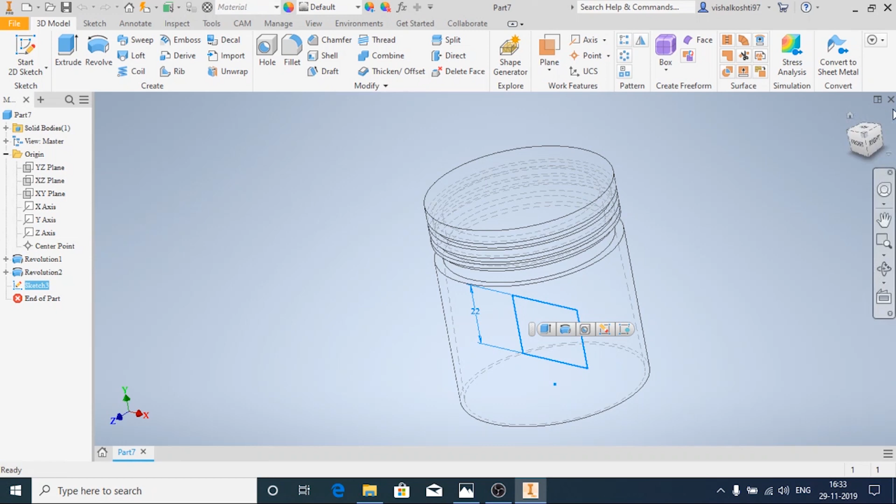Open Inventor and then click on New. In Metric, choose standard mm.ipt and then click on Create. Start 2D sketch and then choose the XY plane. First, I'm going to draw only this upper profile and then I'm going to use the option Revolve.

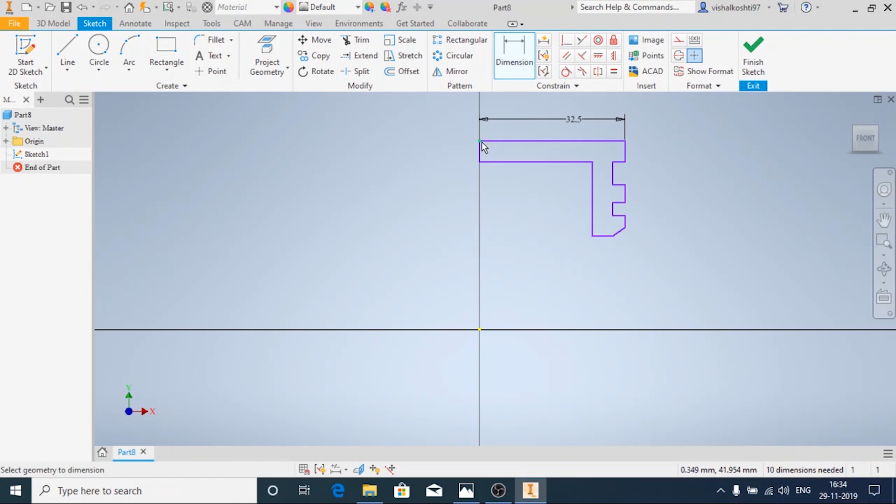Now we'll add the dimensions to it. This dimension is given as 65 divided by 2. We are going to enter only the half of the dimensions since we are going to draw only the half of the profile. Sixty-five divided by 2, and the height is given from the bottom as 64.

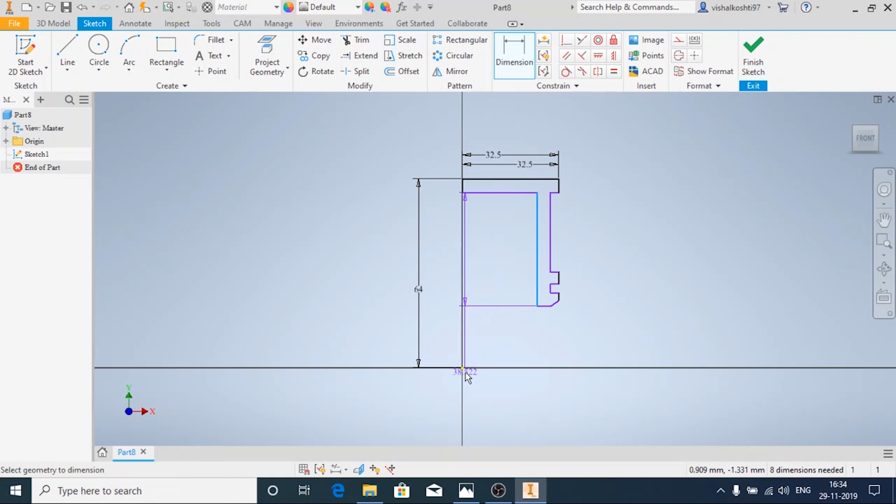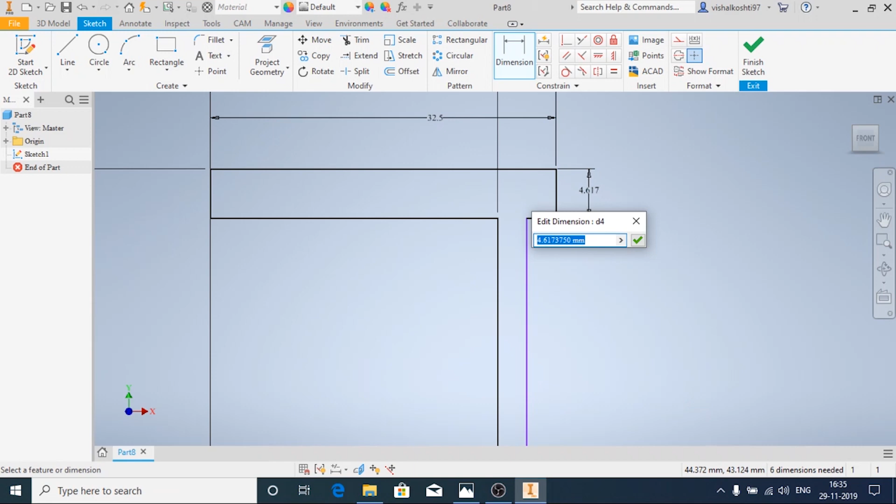And this is given 54 divided by 2. This is given as total as 5. The inner distance is given by 2.4.

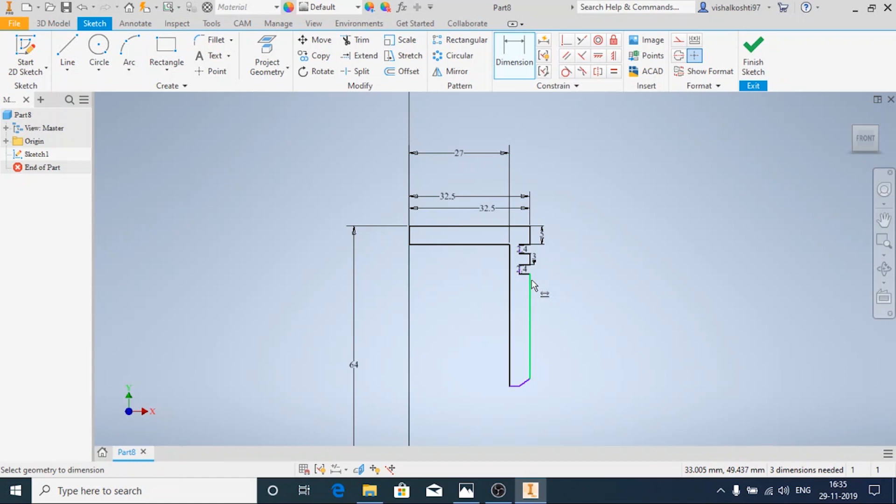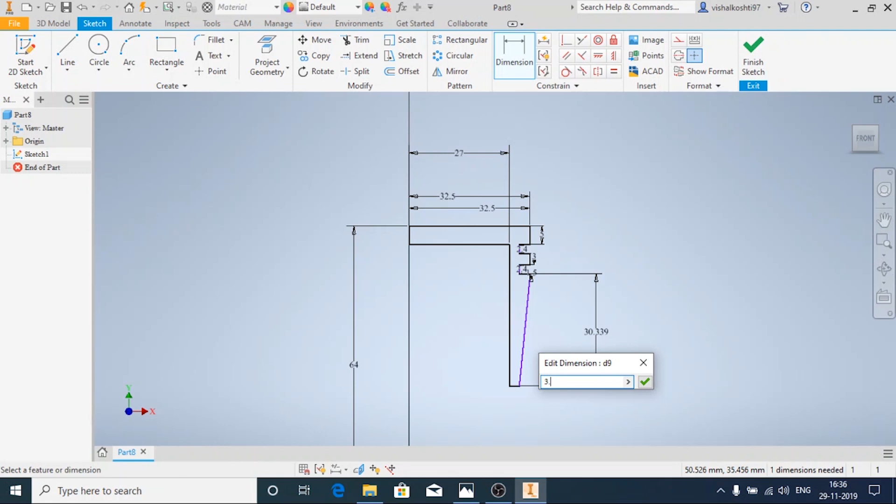This is given 3. Again this is given by 2.4, and this is given by 1.5. This detail is given in this view. As you can see, this is 1.5 mm and the total is 3.2. From here till here it is given as total 3.2, and the angle is 135.

Now it is fully constrained, and then click on Finish Sketch. Now we are going to use the option Revolve. By default the profile is selected. If the profile is not selected, make sure the profile is a closed profile and there is only one closed profile. I'm going to choose this axis and make sure it revolves at an angle of 360 since it is a complete circle.

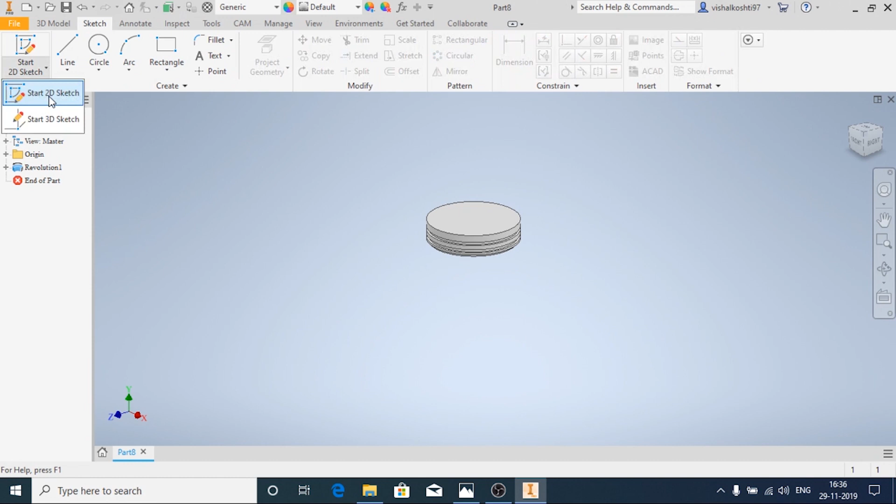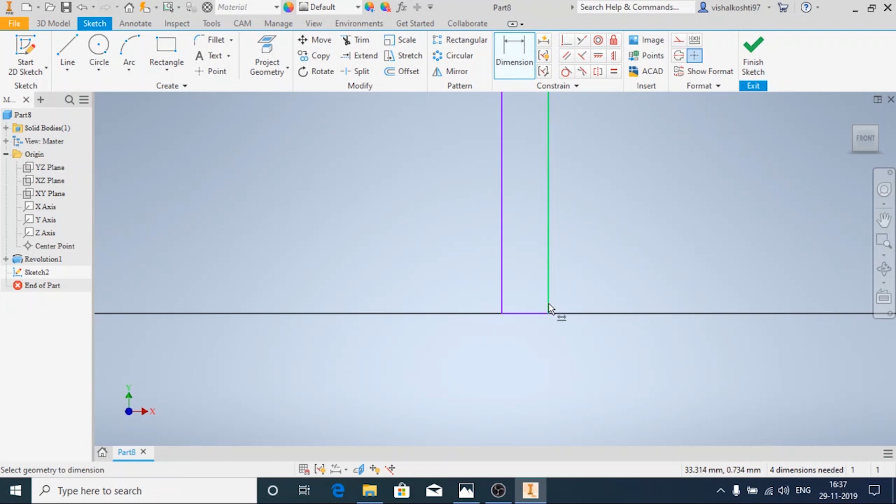Now again go to 2D sketch and then click on XY plane. Now we are going to make the bottom half. Now I'm going to dimension it. I'm going to add a horizontal constraint and now I'm going to add dimensions to it. From this point to this point it is 65 divided by 2. 8 divided by 2, and the inner is 62 divided by 2.

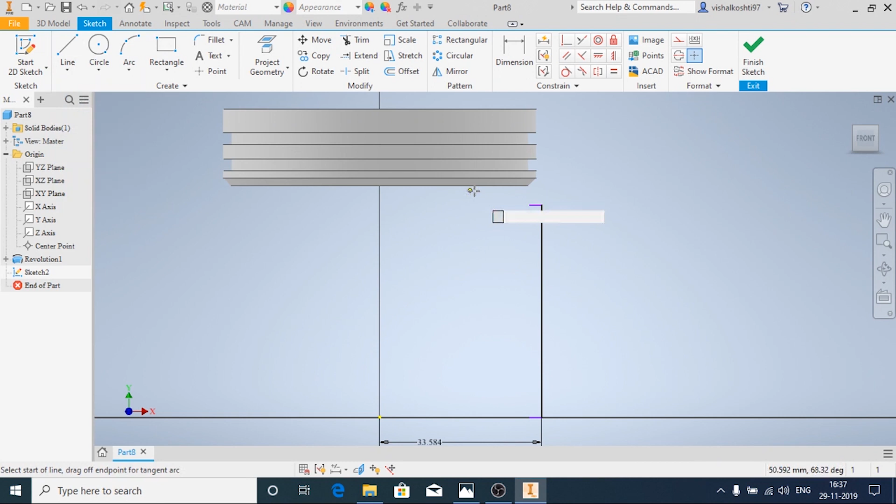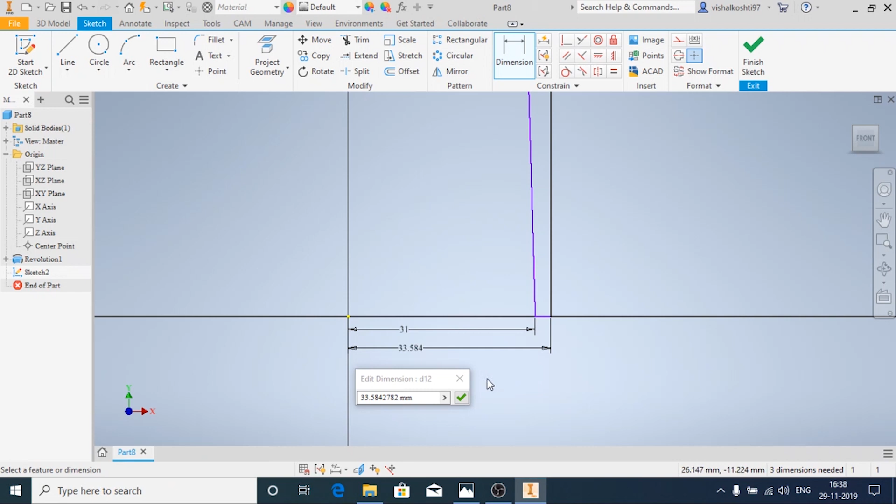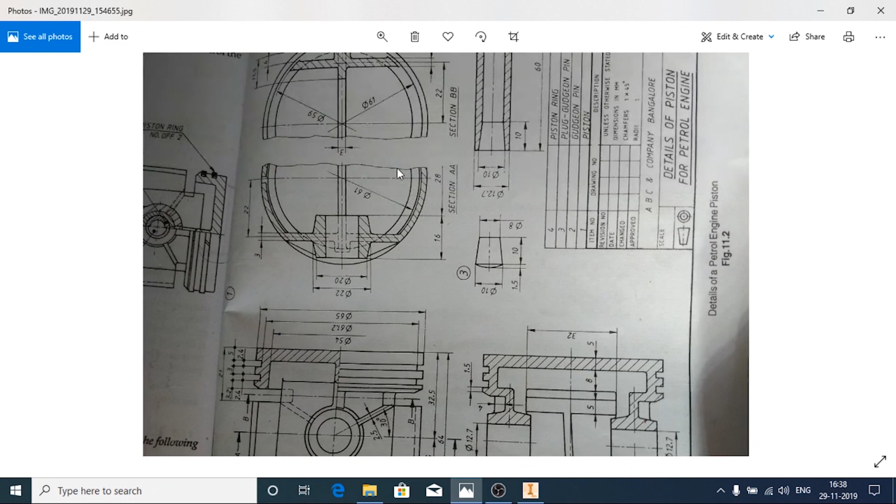Make sure this line is not the straight line. To trim this. 62 divided by 2, and this is 65 divided by 2. And from the top the distance is given as 21. Here it's given as 21 mm from the top, and at the top the inner diameter is given in this view, that is 59 mm. So it will be 59 divided by 2 again, and then click on Finish Sketch.

And now we'll again choose the option Revolve. By default the profile is again selected, and then we'll revolve at an angle of 360 degrees and then click on OK. And we are going to change the view type. I'm going to change it to wireframe with hidden edges. Now start 2D sketch in the same XY plane.

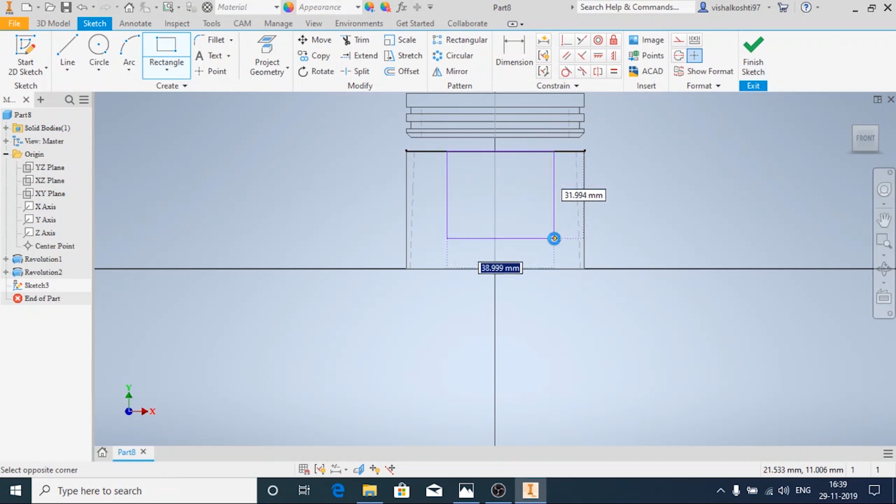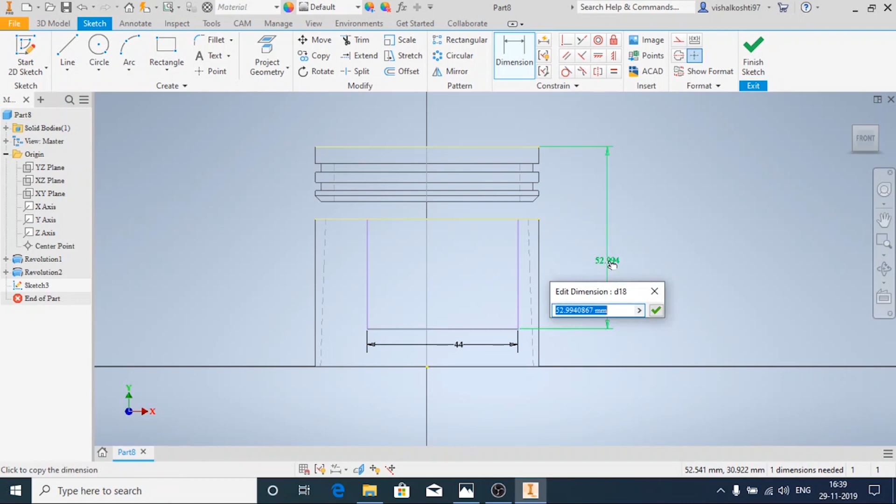Now I'm going to draw the rectangle. It's going to be 44 mm. Since it should be symmetric, I'm going to give this dimension as well. From the top till the bottom of the rectangle, the distance is given by 17.5 plus 32.5. So let us enter the dimension as it is: 17.5 plus 32.5.

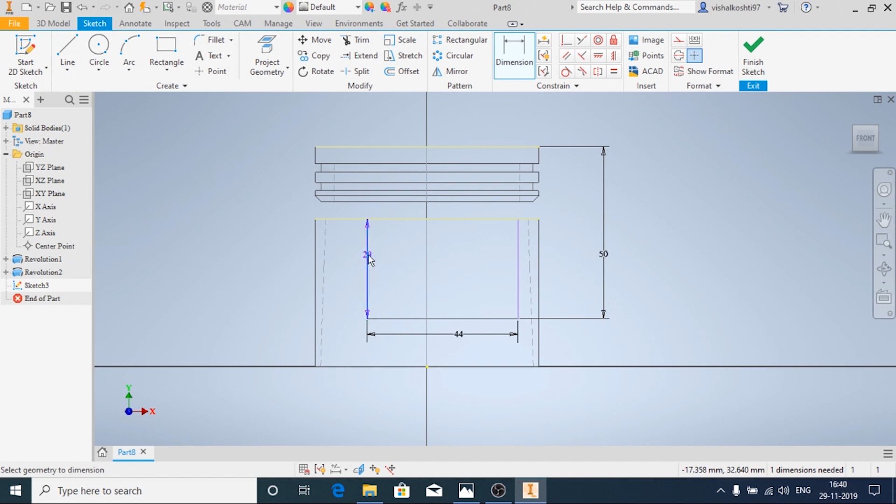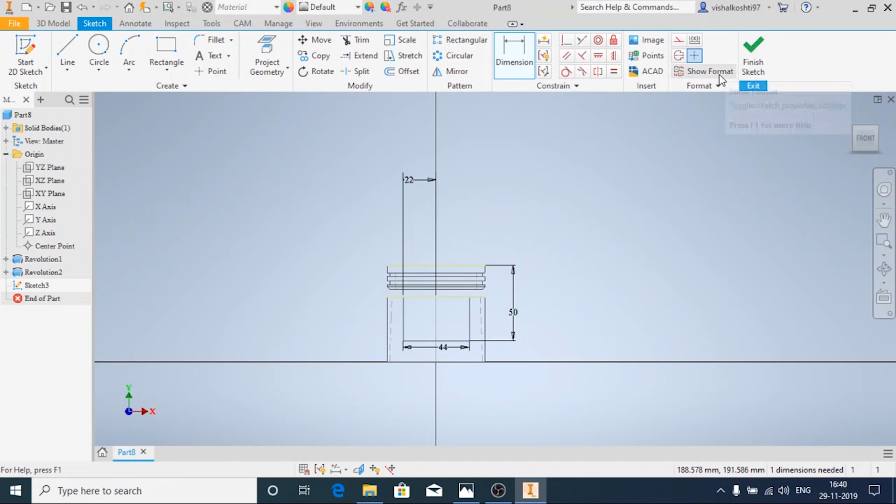I'm going to make a construction line over here. From this line to this line, it is 22 mm, since it should be symmetric. Now it is constrained. Now I'll click on Finish.

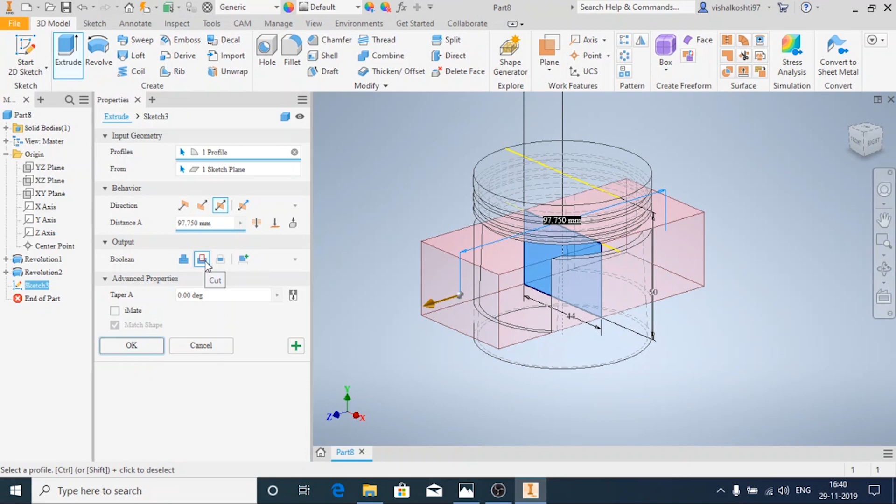I'm going to cut it using the option Extrude, and since it should be symmetric, I'm going to choose the direction symmetric, and now I'm going to pull it in the opposite direction. In the output there is a boolean. Choose the option called Cut because we have to remove the material right now. Now we'll see it shaded with edges. Now we'll make this one visible.

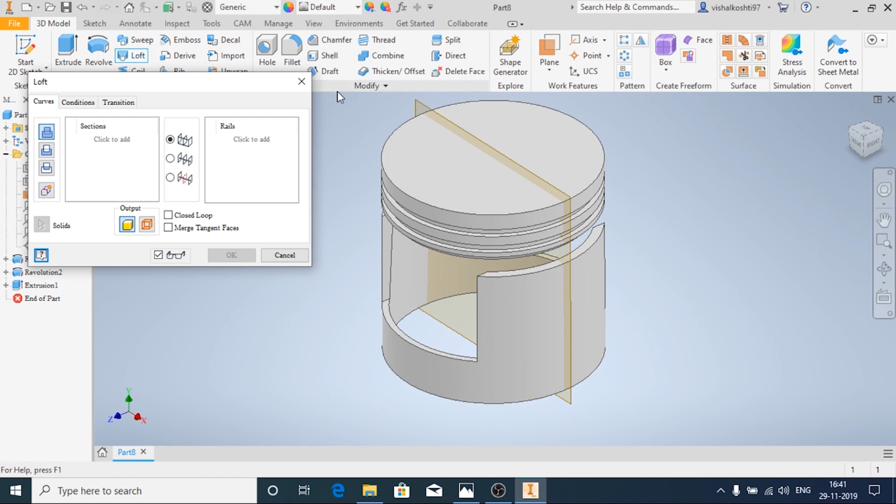Right click and then click on visible. Now we are going to create 3 planes because we need to draw this profile, and since it is not the symmetrical profile, we are going to use the option loft, and we need to draw 3 different profiles. So we are going to make 3 different planes.

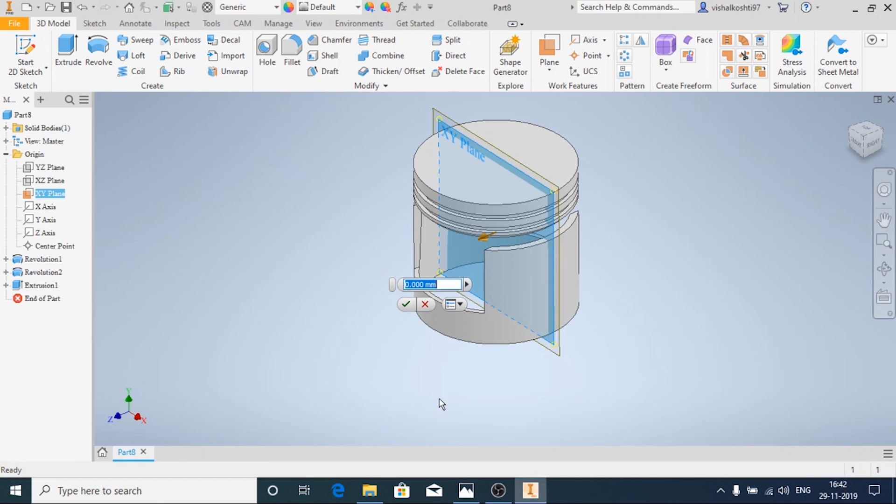You can add the plane by just using the plane option over here, and then just offset from the plane, and we are going to specify the distance. The first distance is given by 32 mm from the center, sorry, 22, and from this point to this point 8 mm,

and now you can choose this plane or this plane. If you're going to choose this plane, it is going to be -8. If you're going to choose this one, it is going to be -16. Now we'll hide this XY plane. Just right click on XY plane and untick the visibility mark.

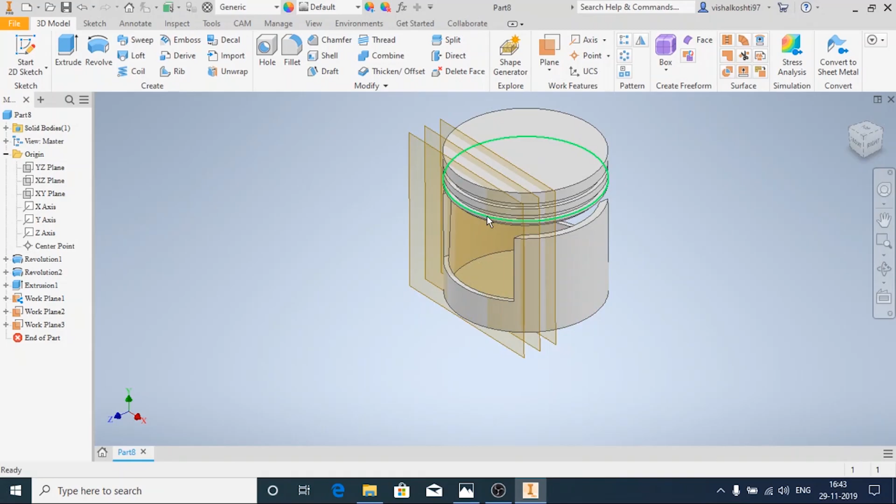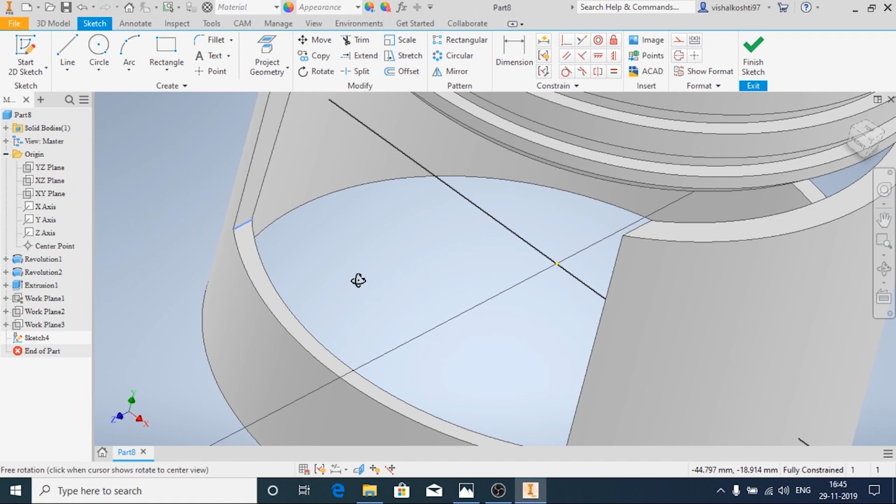I forgot to add one more feature. I'm going to hide these three work planes, and now I'm going to choose this plane. I'm going to rotate it and I'm going to project this geometry as it is. This geometry as well as this line, I'm going to project it. That is, you don't need to draw the line. Whatever is there in the surface, that line will be projected. Now you can see, now I'm going to make a rectangle from this.

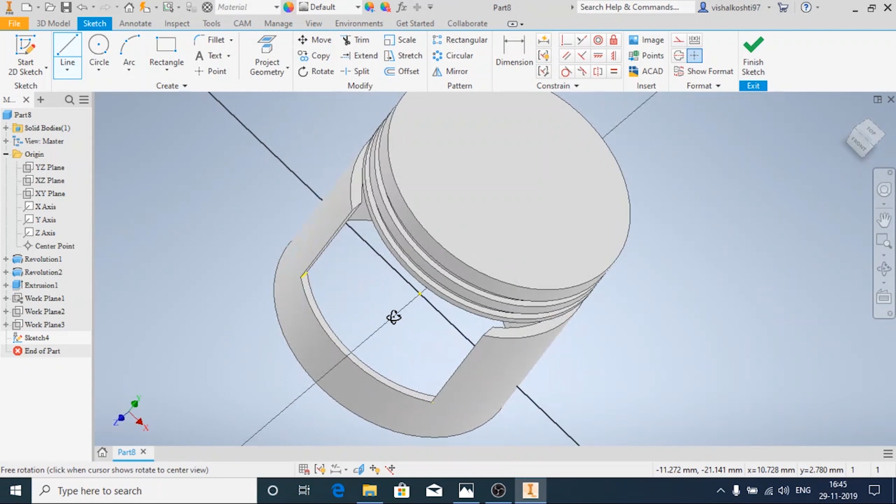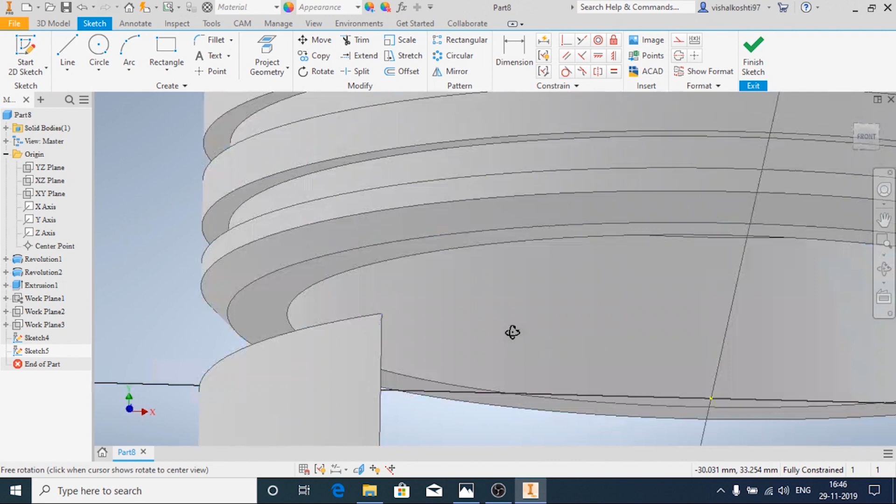Now I'm going to draw one more profile over here. We cannot use the extrude option for extruding this rectangle since this circular profile is not symmetric. It is thin at the bottom and thick at the top. So again I'm going to choose this profile and then select the plane about which you need to draw the sketches. Now again I'm going to choose this plane, this plane, and then click on project.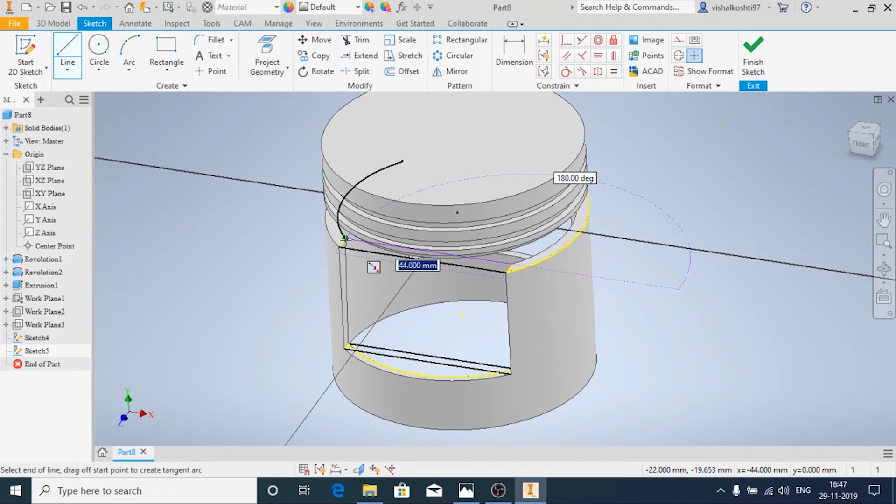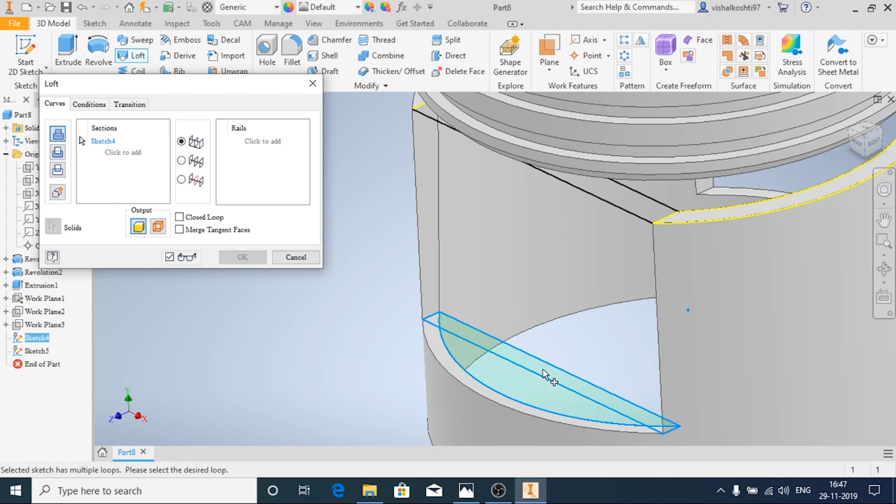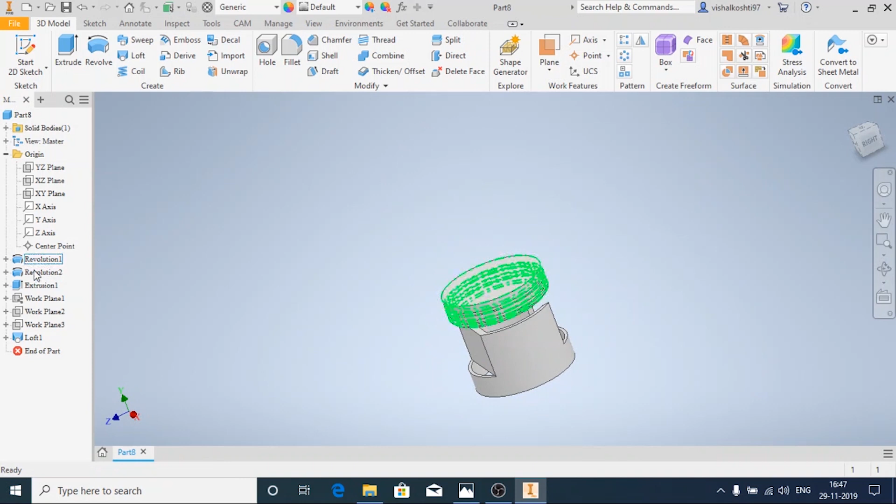Then click on finish sketch. Now we'll use the option called loft. Click on loft and then choose this closed profile, and this profile. Now you can see the material has been added. Now we'll make all these work planes visible. Right click and then click on visibility.

And now we are going to draw three different circles on three different planes using these details, 20 mm diameter and 22 mm diameter. Just click on the outermost plane and then click on the sketch. In the center plane is the biggest circle, and in the inner and the outer plane the circle is of smaller diameter. So first we have chosen the outer plane, so it will be the diameter of 20 mm. So let us make a circle of diameter 20 mm.

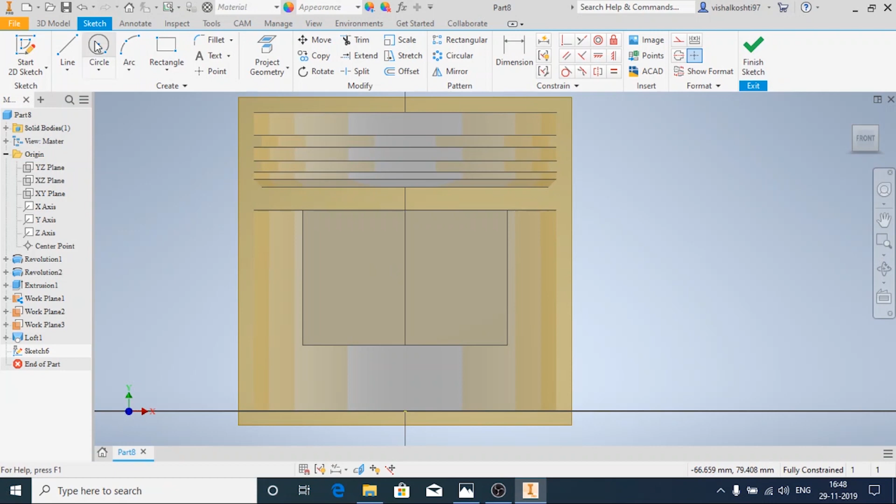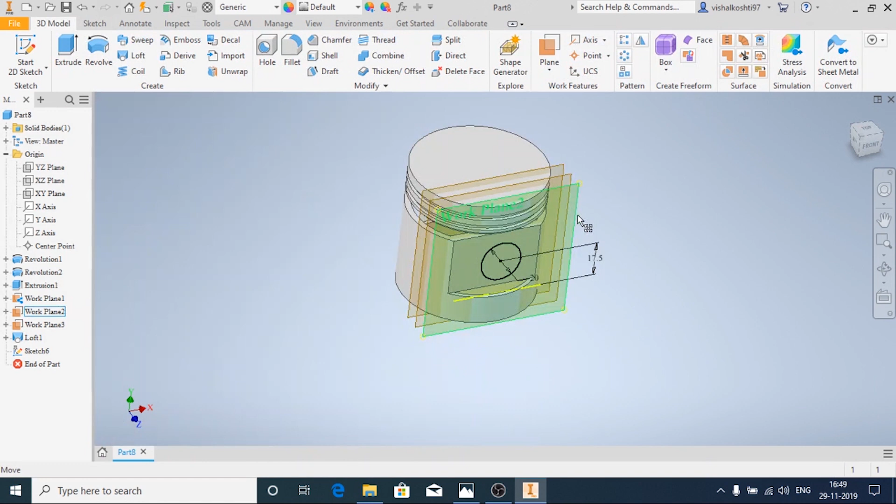And the distance of the center of the circle from the top is given as 32.5 mm, or from the bottom of the square also you can give it, that is 17.5 mm. And now I'm going to add, since it is the smallest circle, the diameter is 20 mm. Now we'll choose the third plane and start the 2D sketch.

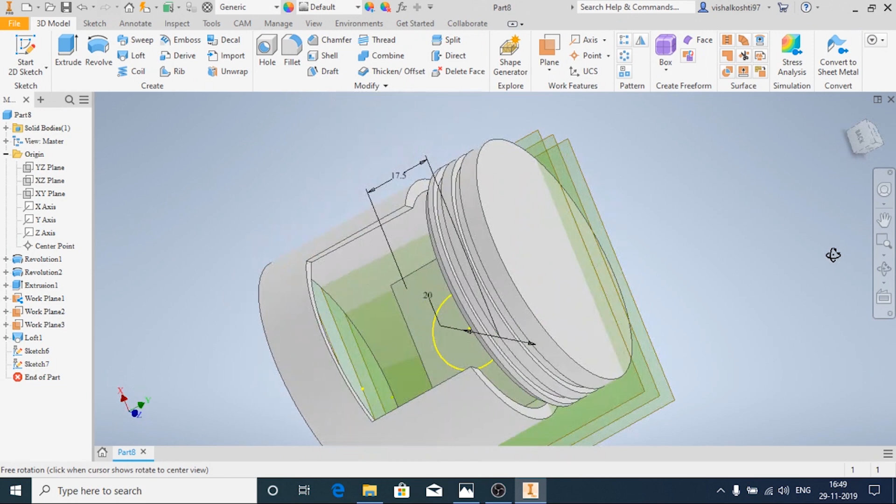Now I'll not draw the circular profile again. I'll just project this. That's it. You can see it has been projected. And now we'll choose the center plane, and I'm going to draw a circle again. And I'm going to make these two circles concentric so that the center point remains the same. Now I'm going to add the dimensions. It is 22 mm.

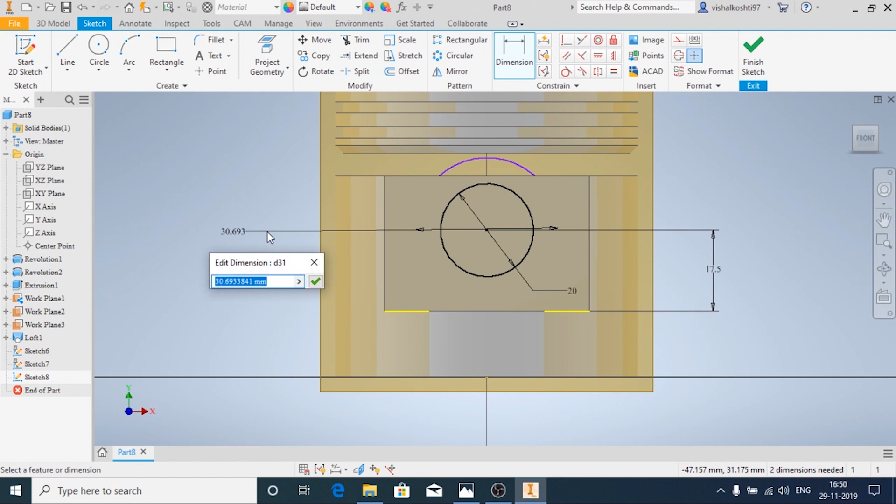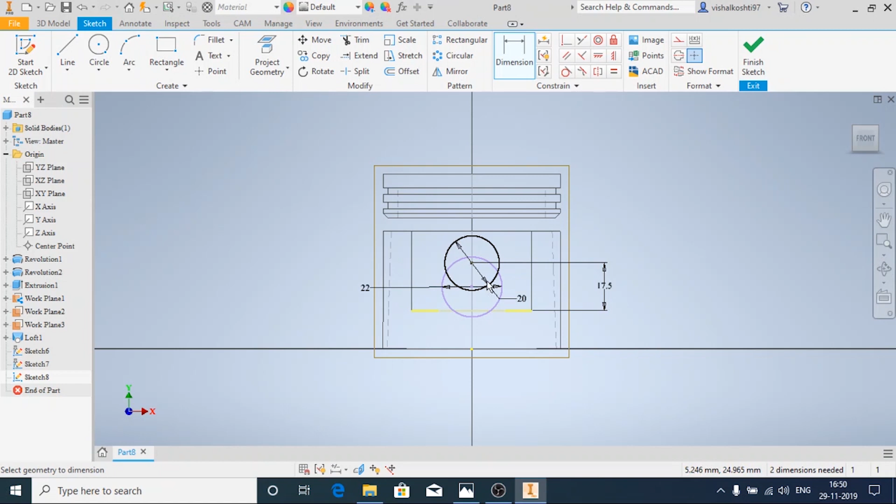I'm going to change the view, since I'm going to add one more dimension to it, 17.5, and I'm going to make it. Now I'll hide all these work planes, and now I'll choose the option called loft.

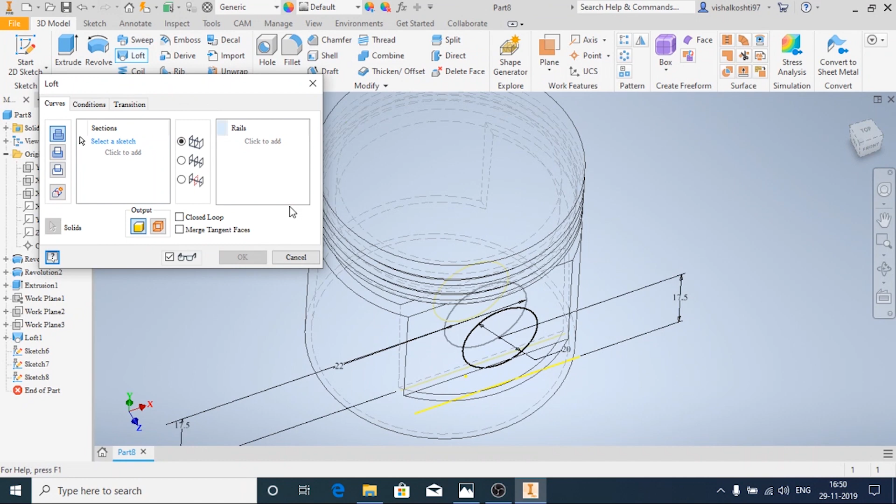Loft is the option which is used to make different profiles, and you can provide them with the guide curves, that is the path along which the material has to be added, and it should be done in order. The circles should be selected in order, otherwise the proper profile won't be generated. And then click on OK.

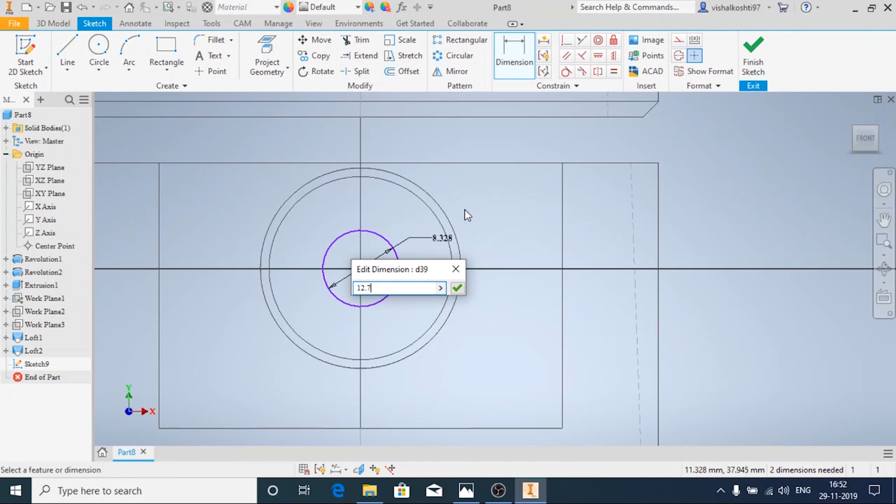Now I'm going to add this inside hole, which is of diameter 12.7. I'm going to use this plane and then start the 2D sketch. Diameter is given as 12.7 and 17.5 mm. I'm going to add one more constraint.

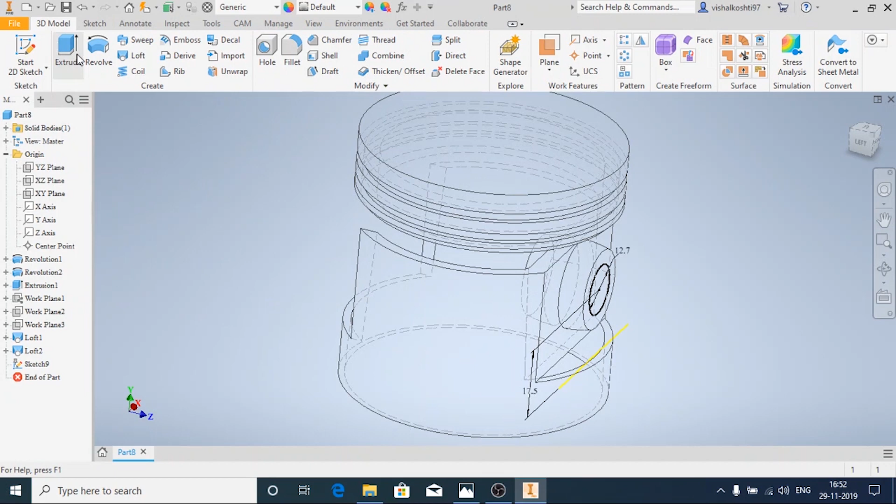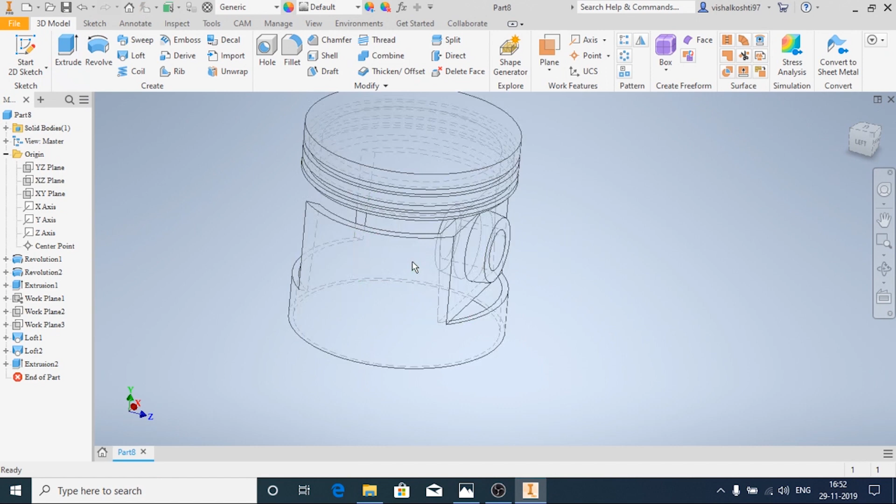Now I'll use the option extrude to cut the material. In the output, I'm going to use the option cut to remove the material, and then click on OK. Now I'll change the view back to shaded to check that it is proper.

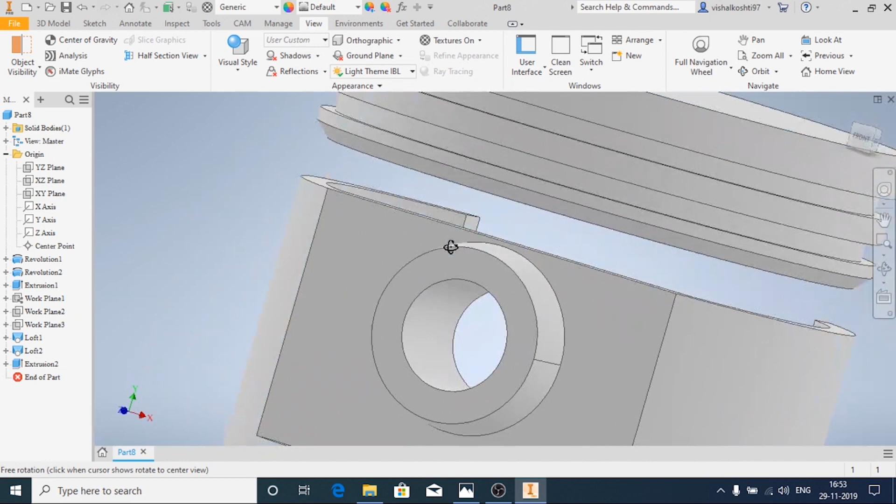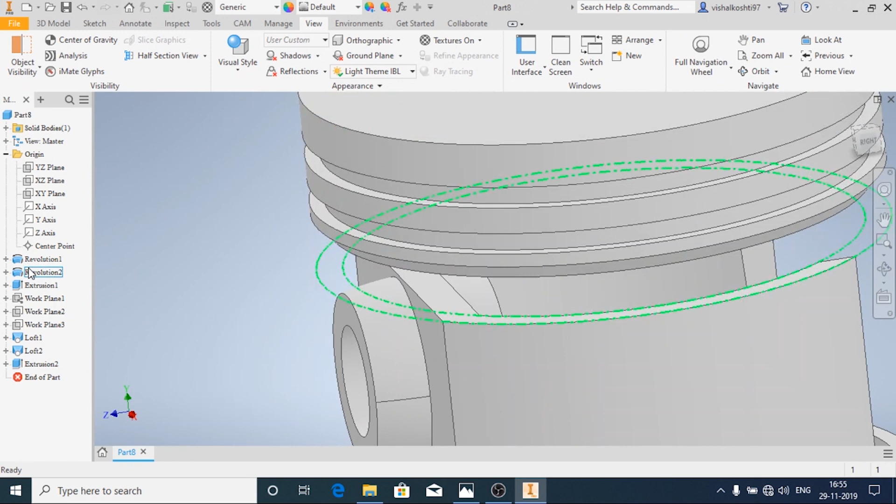Now whatever I have done on this side, using the mirror option we'll do it on this side later, because we are going to do some other features which are required again for mirroring. Now for the time being, let's hide this one using the option suppress.

Now go to sketch, start 2D sketch and select this plane. And these details we are going to draw. The outside is given as 6 mm and the inside 3 mm thickness. This distance is 4 mm.

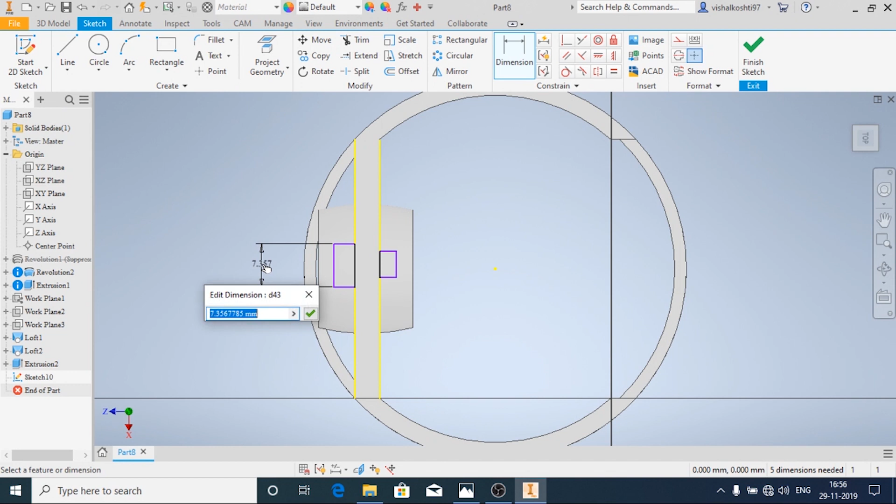Now let us add the distance. This is 6. From this point to this point is half, so it is 3 mm. Same goes with here. This total distance is 3. This to this is 3 divided by 2, that is 1.5. From this point I choose 1.5.

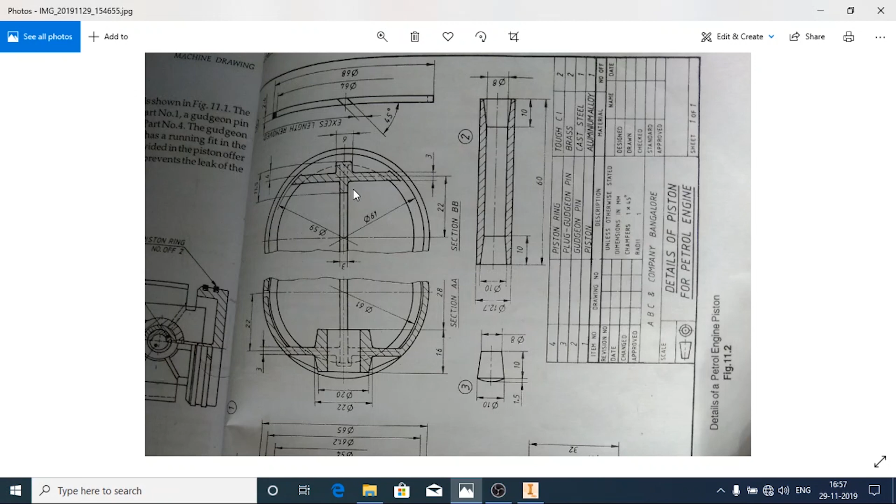This distance is given by 4 mm from this point. And the total distance from this point to that point is given by 11.5. So from this point to this point it is 11.5.

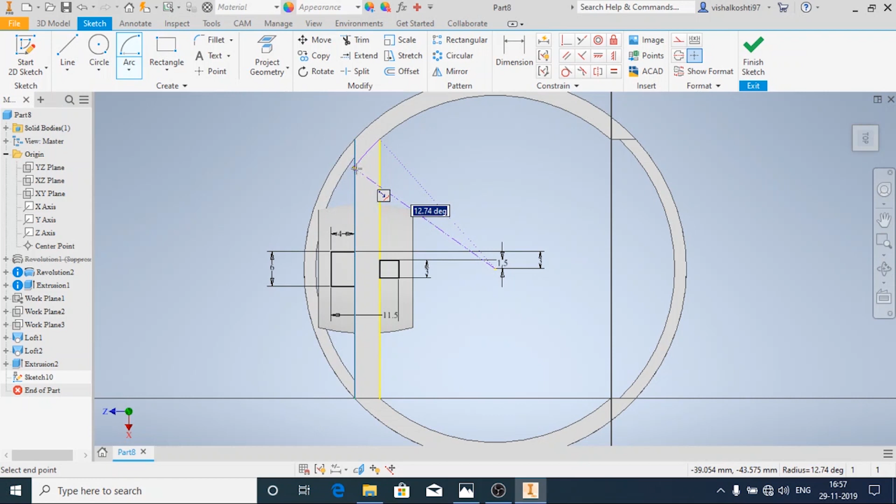Now we'll make an arc. We know the center point. Same. And one more arc. This and this should be concentric, and yeah, this one should be concentric. It's already concentric.

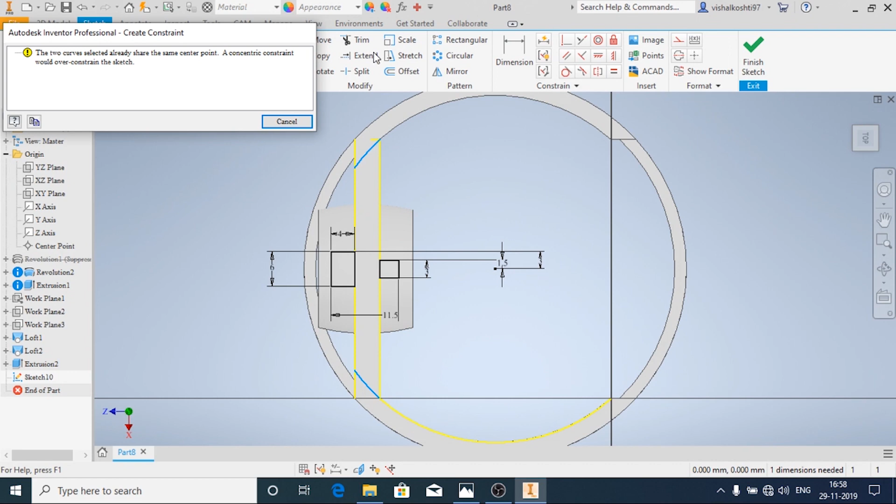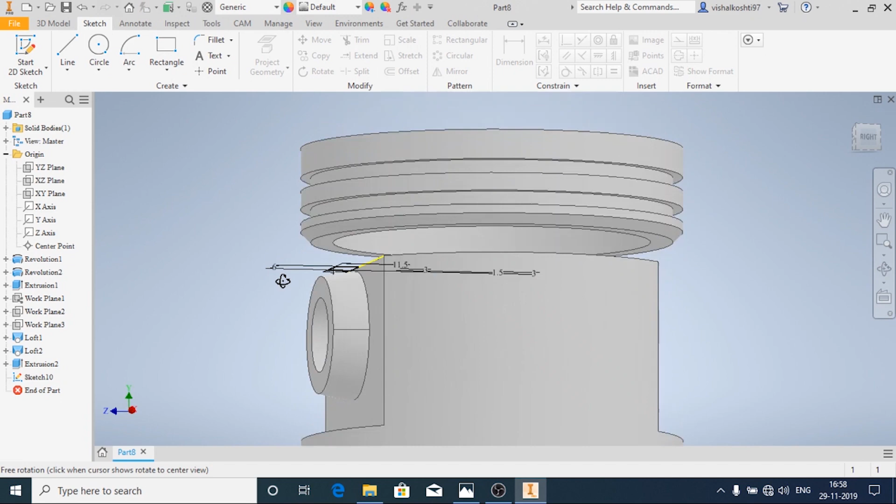And now we'll unsuppress this. We'll click on finish sketch and then click unsuppress this feature. Now we'll change the view type. And now we'll extrude the geometry one by one. I'm going to extrude it on the opposite side till the surface.

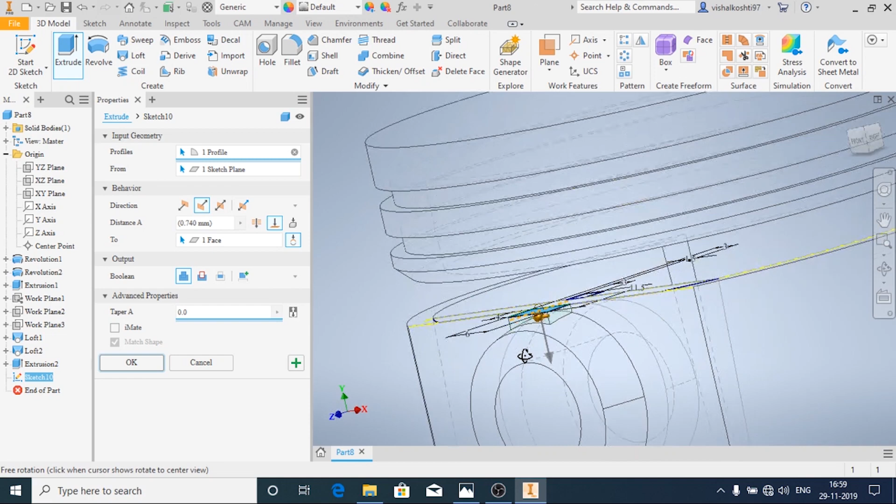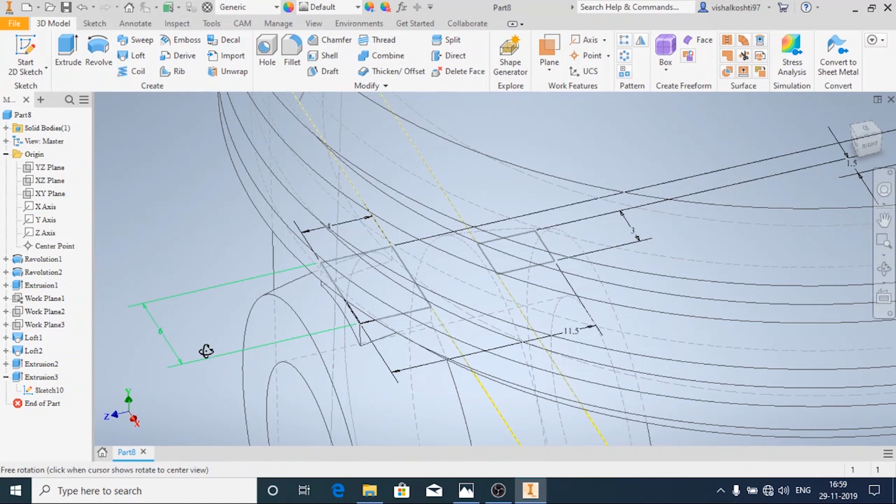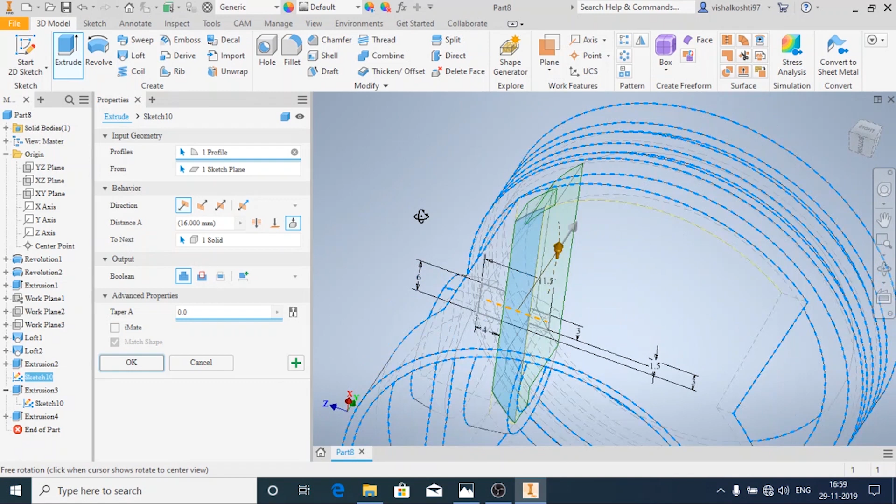I'm going to choose one profile first. Next, I'm going to choose this profile. First, we'll do it one profile at a time. Okay. Now we can see that the sketch has been hidden. We can make it visible again. Now again we will extrude this till this piston top.

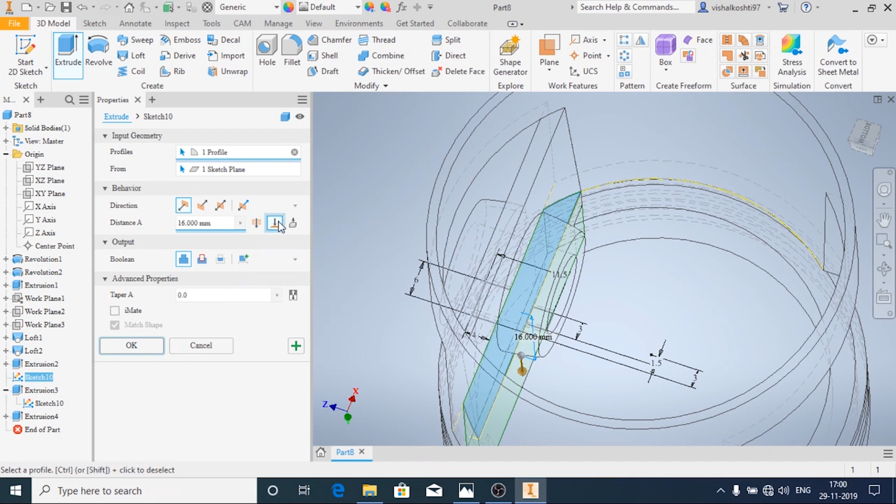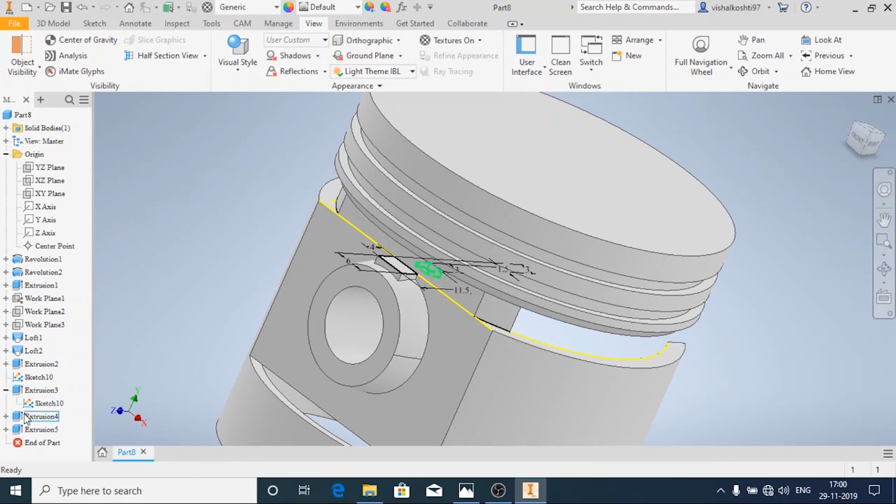Then click on OK. And now we'll change the view back to normal, that is shaded with edges. Now I'll hide the sketch. I need to extrude this again. I'm going to make the sketch visible again.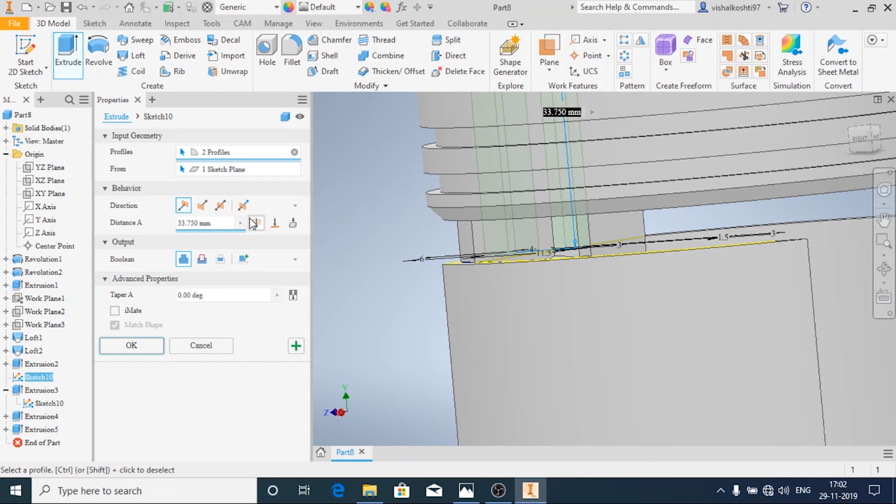And now I'm going to use the option extrude, this and this, and I'm going to use the option up to next, so that up to whichever surface it ends, till there the extrusion takes place. And now I'm going to hide this. Now it is of no use.

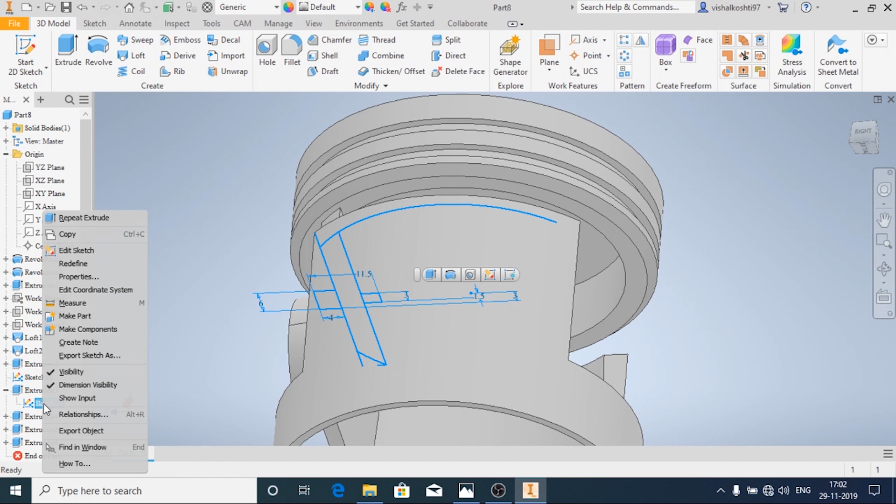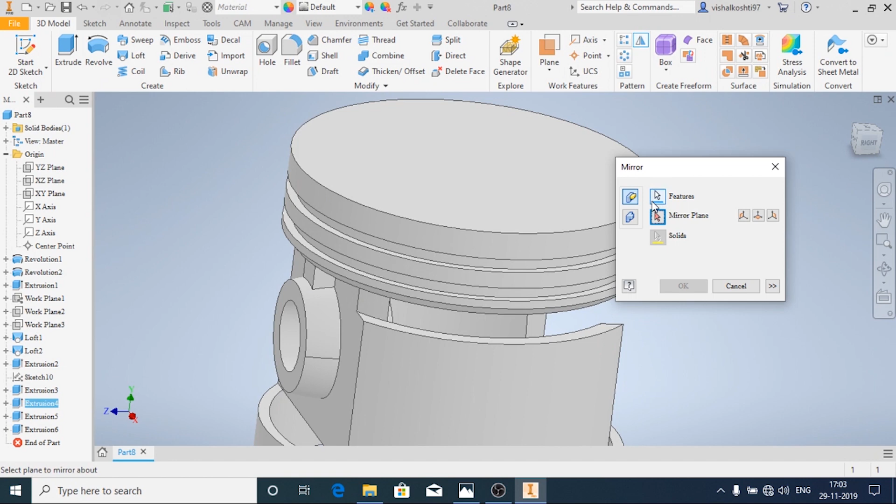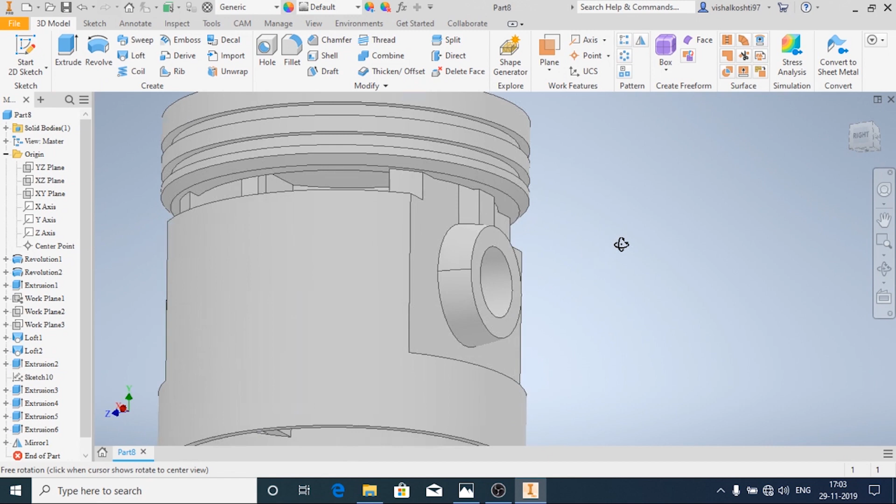Now I'm going to use the option mirror. I'm going to select the features. I'm going to choose this loft 1, loft 2, extrusion, this, and I'm going to mirror it about this axis, and then click on OK. Now I'm going to change the view back to wireframe with hidden edges.

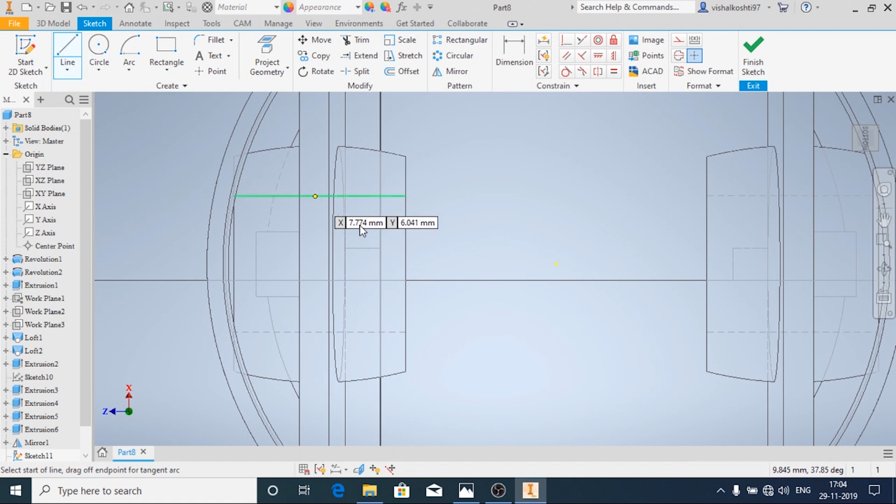Now I'm going to draw a line from this end to this end. Now I'm going to extrude it to a distance of 7.8 mm. 7.8, and click on OK. Now I'm going to change back to shaded with edges.

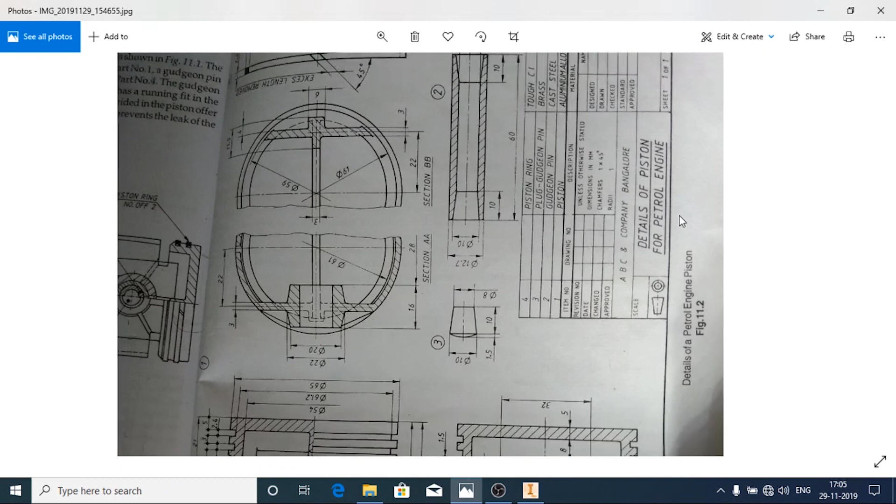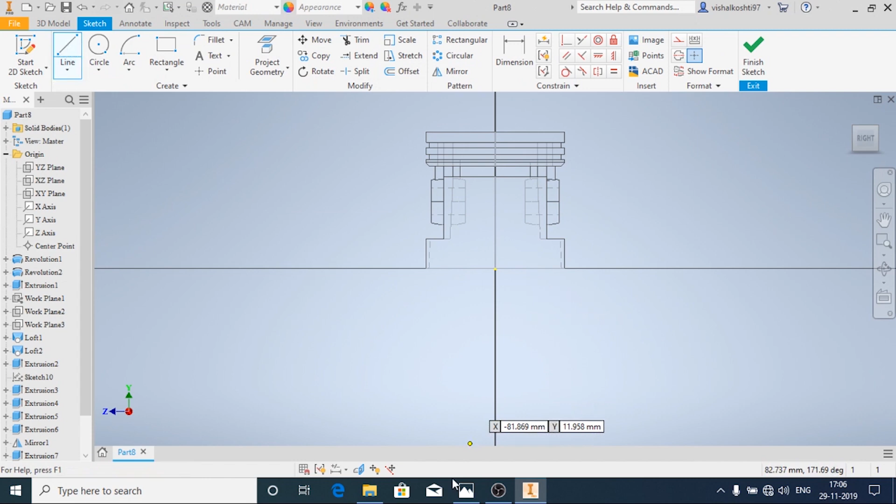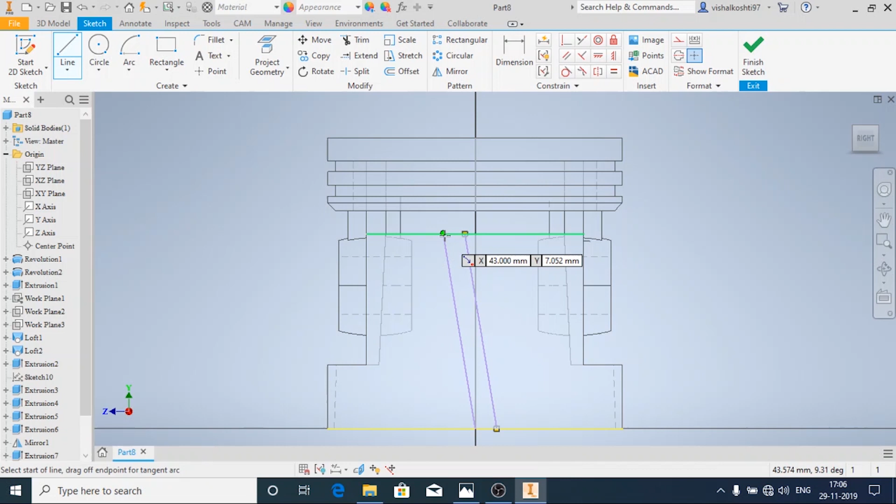Now the last part, we need to cut this slot. I'm going to start the 2D sketch and I'm going to choose the YZ plane, and again I'm going to change the view back to hidden with edges. Now the distance between these two lines is 2.5 mm. 2.5 mm,

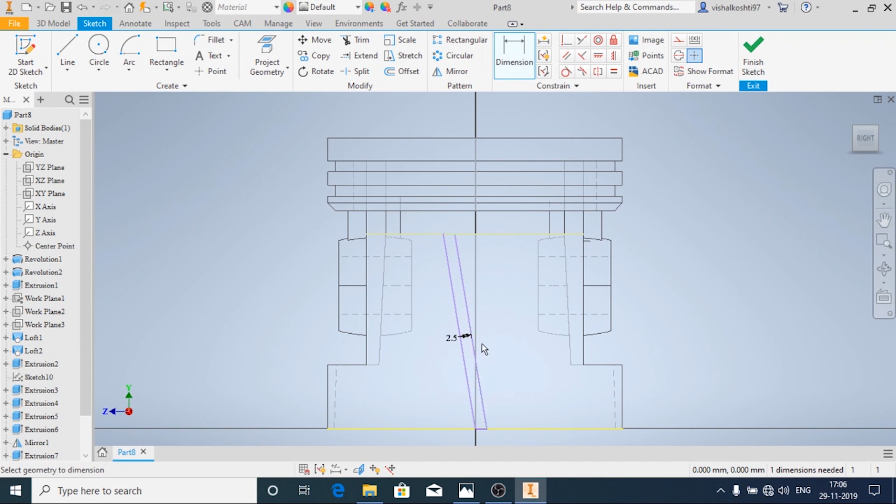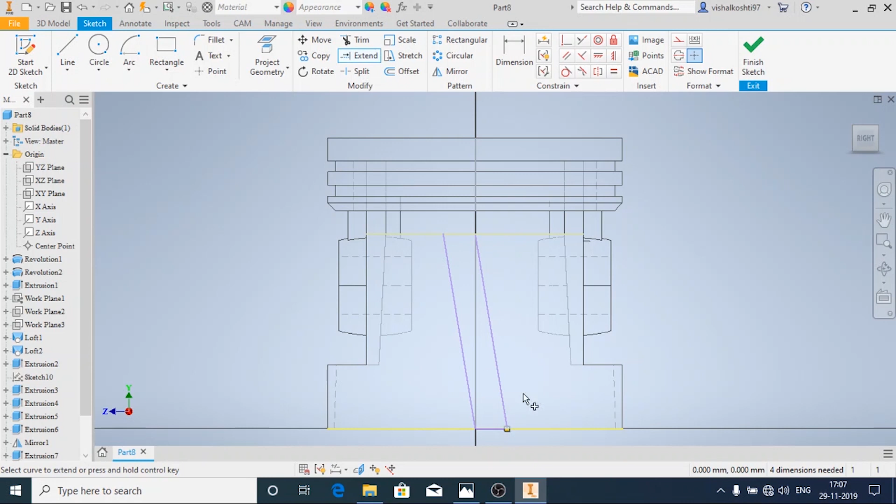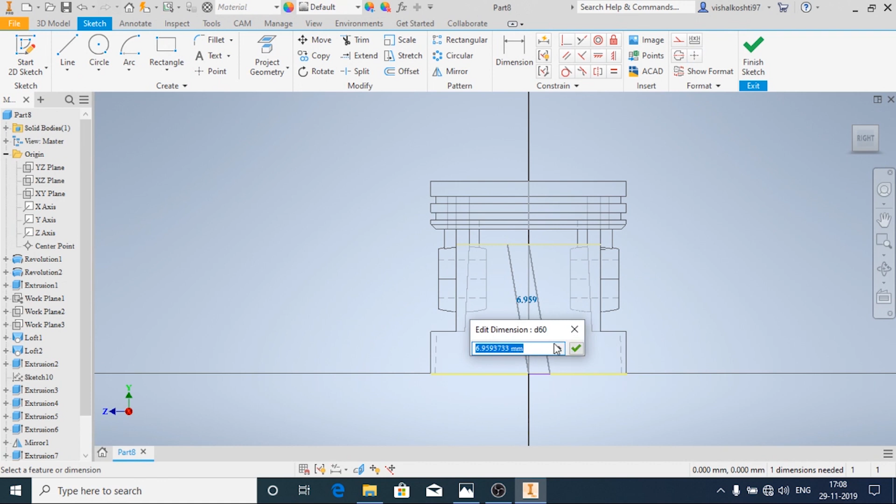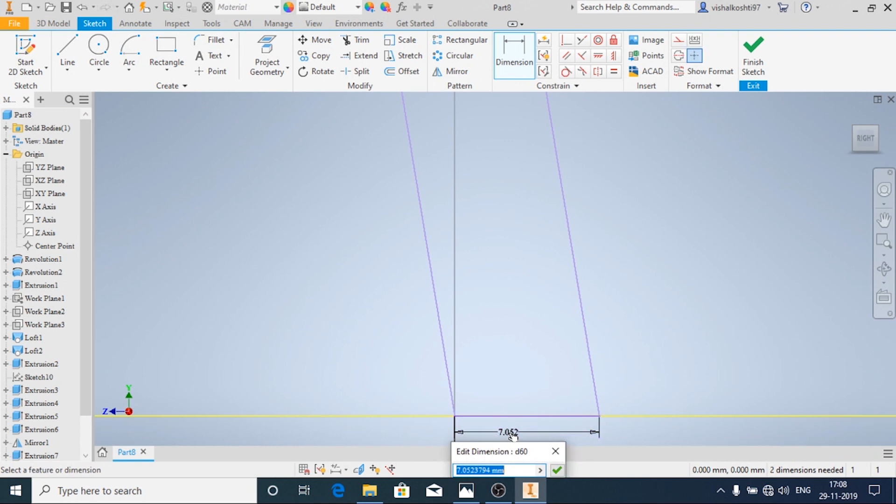and 2.5. 2.5. And they should be parallel to each other.

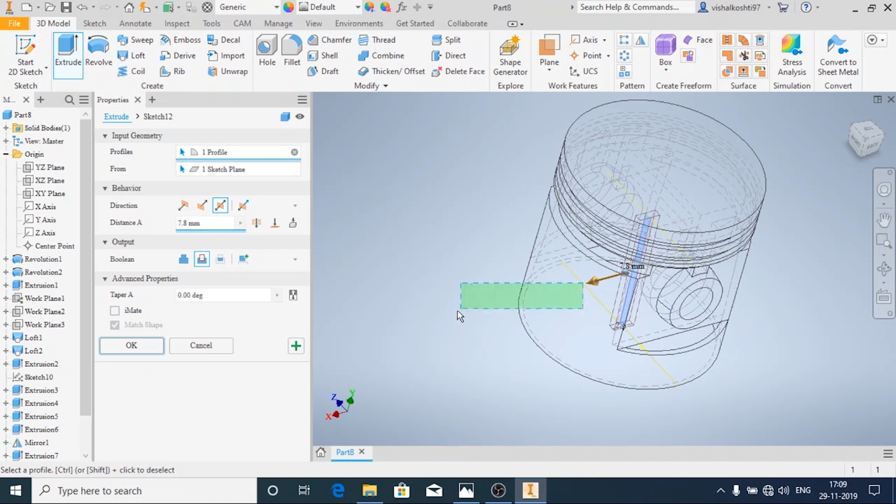Now click on finish. Now I'm going to use the option extrude to cut the material. I'm going to use it symmetric, and then click on OK. Now we'll change back to this.

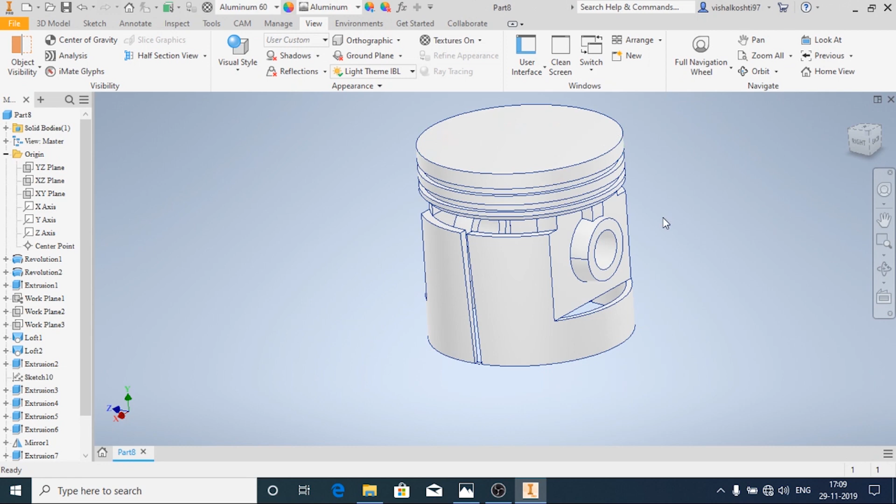And now we're going to add the material to it, and the piston is made of aluminum alloy. So we'll go to iProperties, click on physical, in the material click on aluminum 6061. Since aluminum is not there, we are going to use aluminum 6061, or we are going to create the aluminum material again, and now we are going to save this as piston.